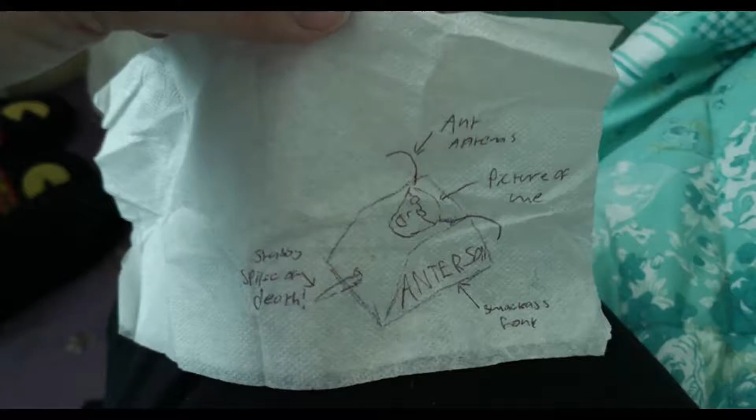I'm here. Right, let's get into it. Now, Anterson has challenged me to design him a robot. He of course sent me the plans, but then I got him to send me some more accurate plans with some dimensions that I could work with. So it looks like we are designing an ant weight, with the intention that he can take it to events or do whatever he wants with it.

I'm only doing the shell though. He will be doing the circuit. He will, well, hopefully he will build a circuit and get it up and running, but that will be on his channel. This is purely design and the prints. We'll fire up Fusion 360 and I will go through the plans, explain how I did it in CAD.

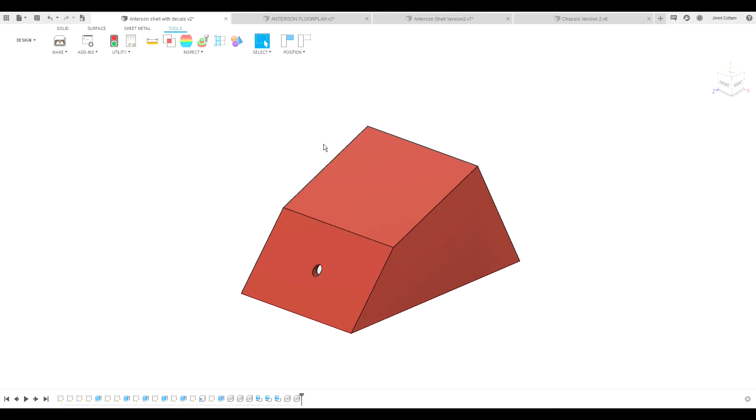So here we have the first design that I threw in. This was in accordance to Anterson's plans. When I initially drafted it, I thought the wheels would have gone on the inside - it certainly looked that way from his initial plan. I modelled the N20 gear motors to see how much space we actually had, and I realised internal wheels might not work as well as the design originally stated.

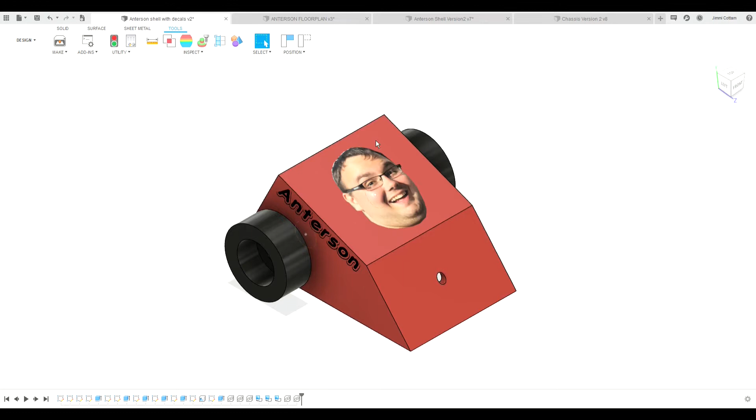This was with placeholder Lego wheels. And of course we have to add in the decals - there we go, Anterson with the kick-ass font. Oh, he also wanted the spike on it as well. There we go, that was the initial design.

That was V1 of Anterson, just to see if it could be modelled really. So the initial idea works, so we tried to run with that one, with the next one.

This one was V2. This one was designed with the components in. I have modelled all of the components that I have in my robot kit.

These are the Pololu wheels, and that's the shell. We've taken the spike out because we didn't think it was going to fit necessarily. Now that the shell's been taken away, you can see how I've tried to fit all the components in. Of course, that is entirely up for speculation.

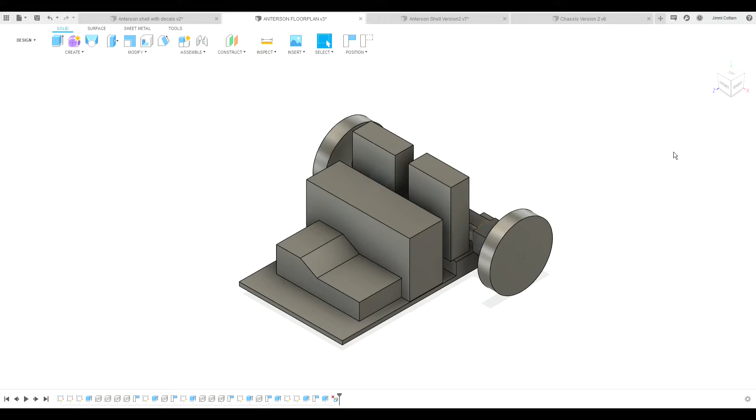I just wanted to see if it would fit on the floor plan. That's how I designed the floor plan. They had raised plinths to keep the N20s above the initial floor plan, so it ran a bit more flush. So there you go, that's the N20s on their motor plinths, so to speak.

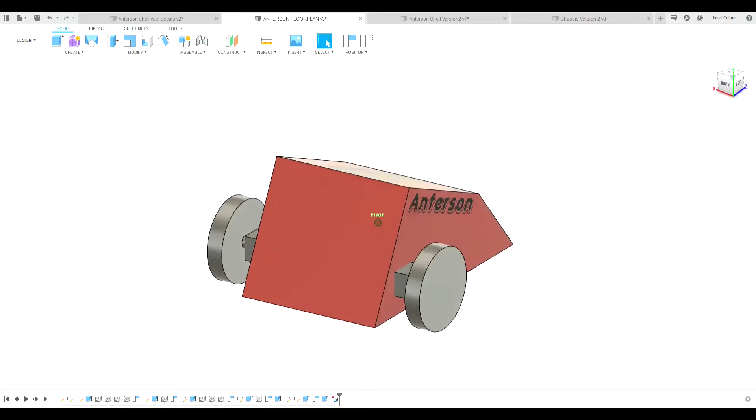So yeah, that was building on the first initial idea, again to see if we could actually do it. Doesn't look too bad in that configuration. It might have worked, but I actually thought there wasn't a lot of space to work with, so that's why we went on to the next version.

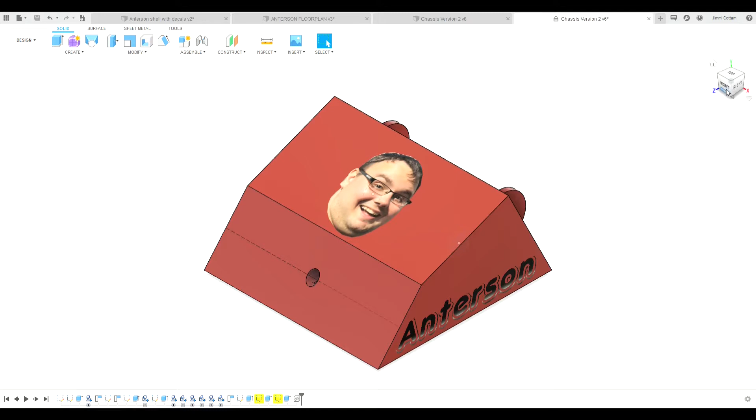This was the next plan. It's what I'd like to call the wide boy, because it is considerably wider than the original design. This was because I kind of liked the idea of having internal wheels. We also added in some riders on the back - that's what these are - to hopefully put it back on its wheels.

And then I realised that the sides are slab. It is a slab-sided design. This was kind of to keep more fitting to the original design while still having internal wheels. So to do that, I just extended the shell to fit into the cube and then redesigned the floor plan.

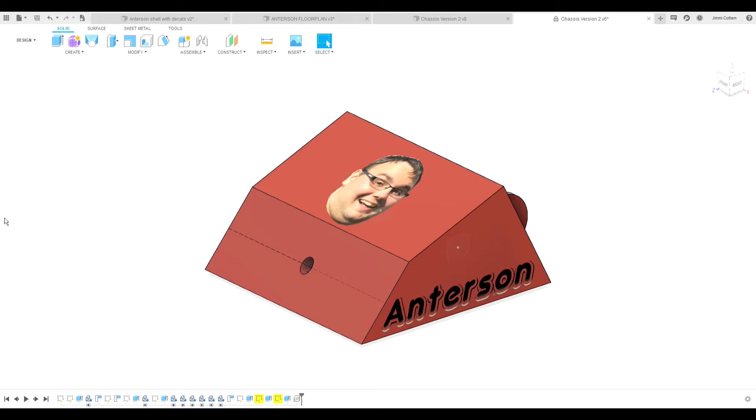Again, it's still got the same components in. So we've got the battery, the two ESCs sitting on top of the gear motors, the same wheels. But you can kind of see how the floor plan was shaping up to fit with the shell.

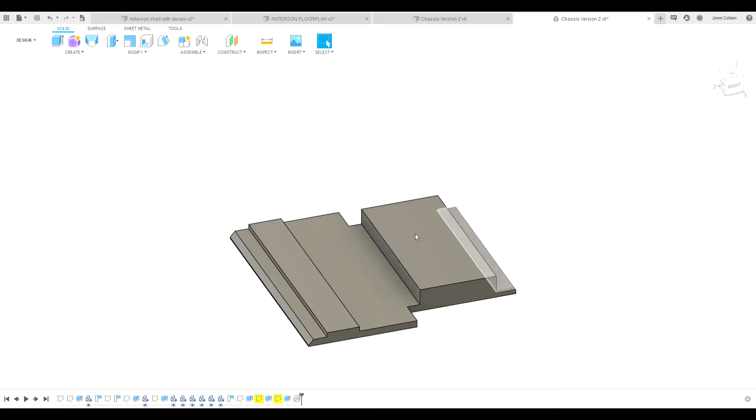But this idea I stuck with. I went with a solid plinth, so to speak, for the N20s rather than just individual ones. Just gave a bit more space to play with, I think.

Got the other wheel anyway. That's how the wheels would have fit in the chassis like that. That's how much clearance you would have had in accordance to this design.

On the inside you can see that we've got a notch here that would fit onto the chassis, the rear of the chassis, and then here is a bit of space. The idea was to screw in this way into here, but I chose not to run with that idea in the end.

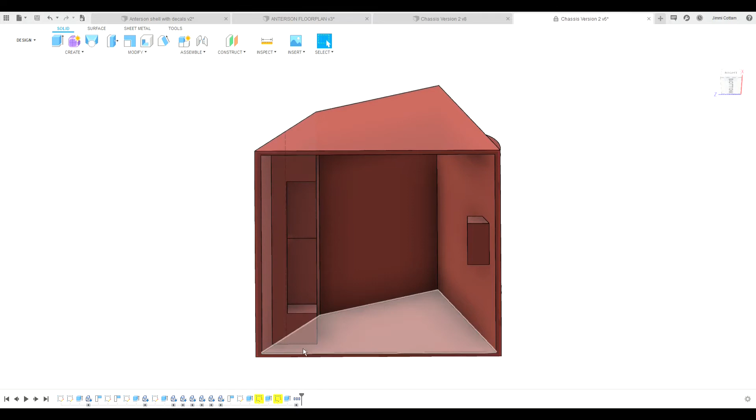I mean, again, this idea could work. Maybe we could have changed the side so it wasn't as slab-sided. That's always a problem - if you get flipped, you'd end up stuck on your side. Which brings us nicely on to the next one.

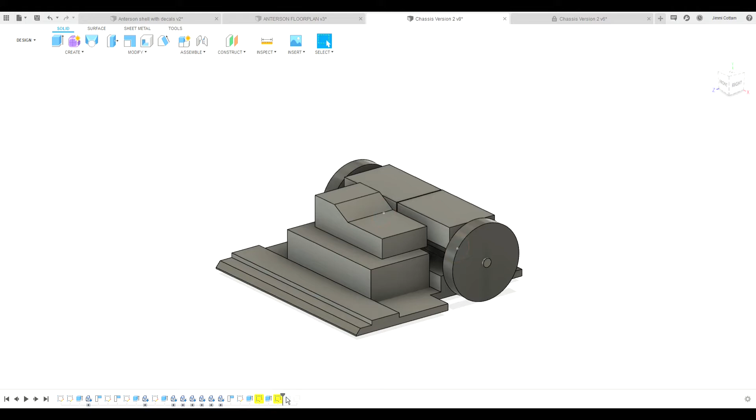I built up the chassis again, and then we basically took the old shell from that previous version and removed the slot around the wheel, which ended up looking like this. As you can see, the wedge is still the same width and it's still the same length, but we have exposed the wheels.

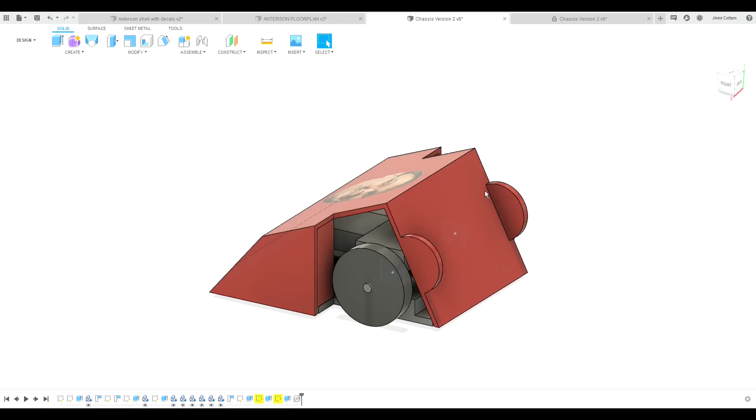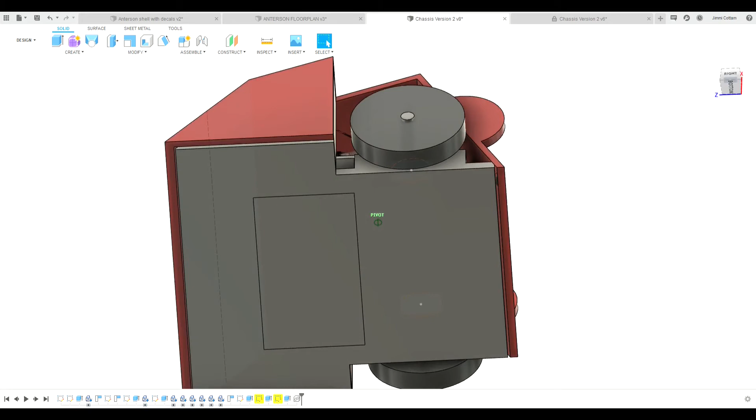So you wouldn't need any screws on the underside. It would all be bolted on here and on the left hand side, which would mean making it much easier to take apart. If you're fighting a robot, you need to be able to get to the internals to fix it. And it gave us a load of space to fit in a switch and the LED power light.

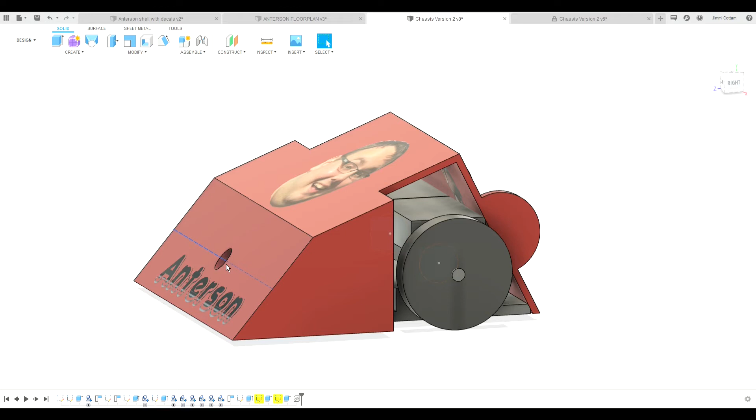Now for the actual design, and you'll see this on the prints, we took the hole out because apparently the printers at 3D Print Direct don't go down to that small. So we took the hole out.

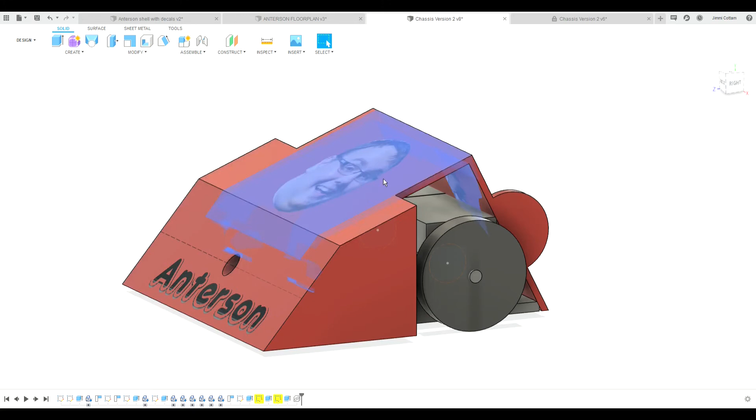If Anderson wants to put in the spiky spike of death, he can drill the hole himself and put it in. There might be enough room. But getting everything in to fit was such an arduous task, because you've got a specific amount of space, and because of the funny angles of the wedge, trying to get everything to fit in nicely was not easy. It was quite puzzling, but in the end I managed to fit all of the parts in.

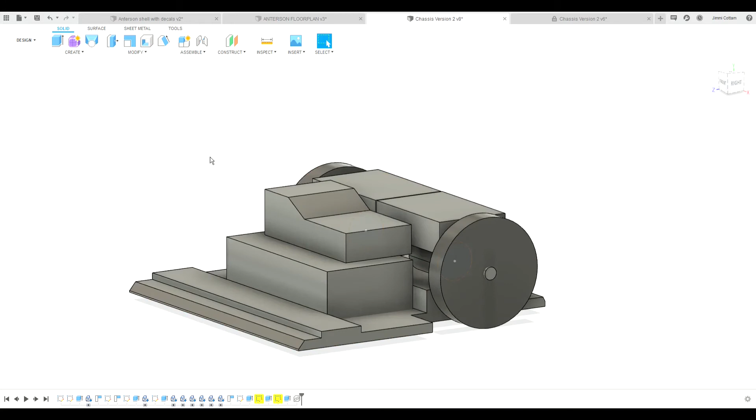Let's take the shell away. If I was building an Anterson, that's how I would lay it out with the parts that I have in my toolbox. But the Bristol Bot Builders have an antweight kit, which uses quite a lot of similar parts, but their ESCs are actually connected to their N20s. So we can take out the ESCs, which gives us a bit more space because they're connected to the motors.

So there we go. That is the design we decided to run with. I'm actually quite proud of that. I'm glad we managed to get all the parts in.

The next step was to send the STLs over to 3D Print Direct. And then in 6 weeks we will have our printed designs. Or now. 6 weeks, 6 seconds.

Let's not leave the postman waiting, eh, shall we? Look what came in the post. It says 3D Print Direct, which is obviously 3D printed parts.

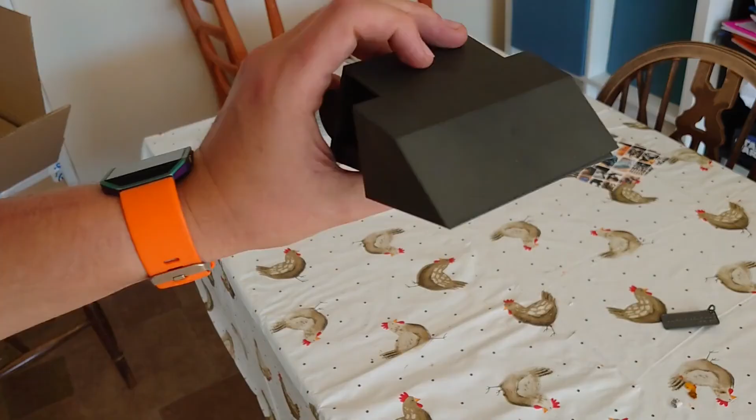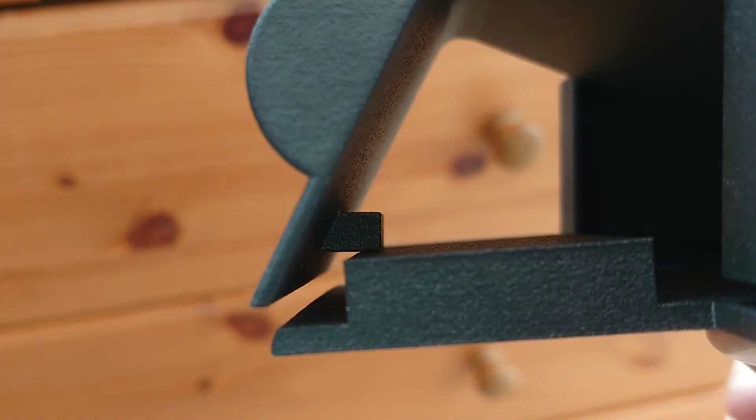But what I need to do is, in here I added in a little lip that would ideally slot in there, but because of the tolerances of the print, it didn't really come to fruition very well. I'm just going to shave off a bit of that square section on the left hand side. That should be an easy fix. Here we go then. No work needed doing to that, and that is done.

All that remains now is to box it up with some flavourless what's-it, and send it on to Anterson so he doesn't get in hot water with whoever he said he's in hot water with.

Yeah, it's been a fun project from my side. Hopefully you'll see how it comes to fruition with an actual circuit in it. Hopefully you'll get to see it running, but you'll have to go and watch it on his channel because my part is done. Thank you to Anterson himself for giving me inspiration, someone to bounce back some ideas.